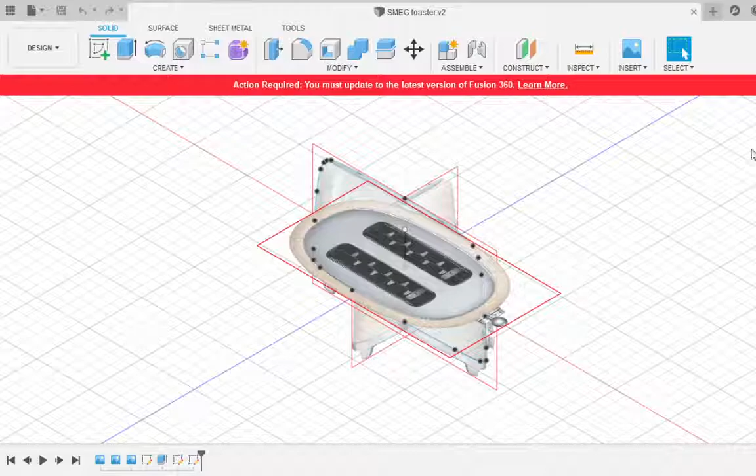All right, so if you've downloaded the model, you should have the front, top, side views of the toaster. We're going to go over the lines. At this point, you should also have a trace line along the side. So I'll let you do the top view of these lines after. But for now, we're going to get this line that we traced around our toaster. We're going to bring it into the third dimension.

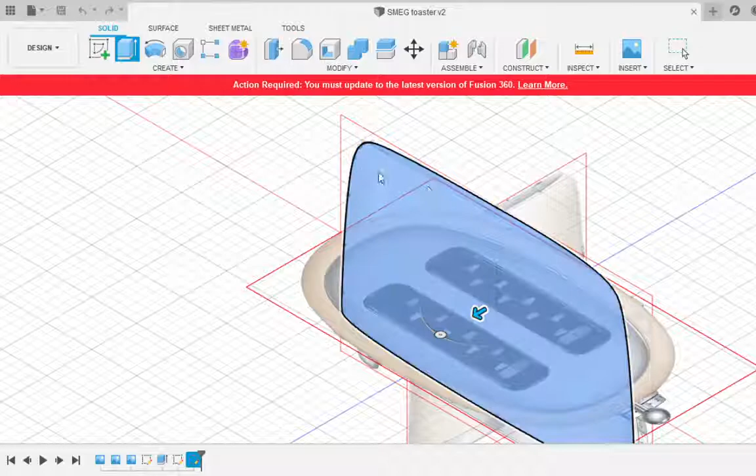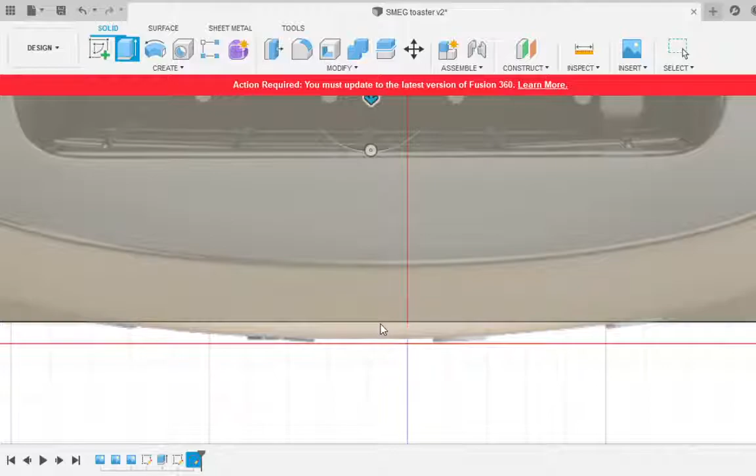We get this shape. We click extrude, and then as we extrude, we'll pick the whole surface that we have here. We're going to pick two sides, so we can go forwards and backwards. And for the amount, we have it hidden. The amount we go out, we'll look at our top view, and we will see how far out our toaster goes. See how we have this little gap over here? So we'll extend our

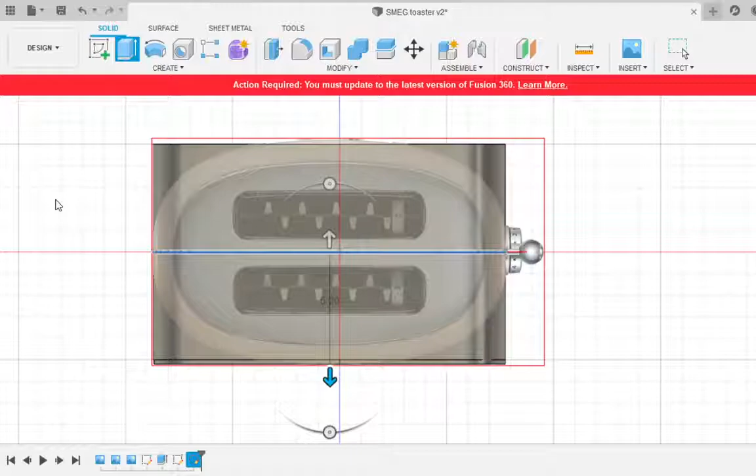body out. I believe we're making a new body. Hold on. A new body. This is just because I already have a body. So we extend this out to this side, and then we extend this side out to here until we hit our container. And when we press done, we should have the side, we should have a 3D, looks like a loaf of bread right now for our toaster.

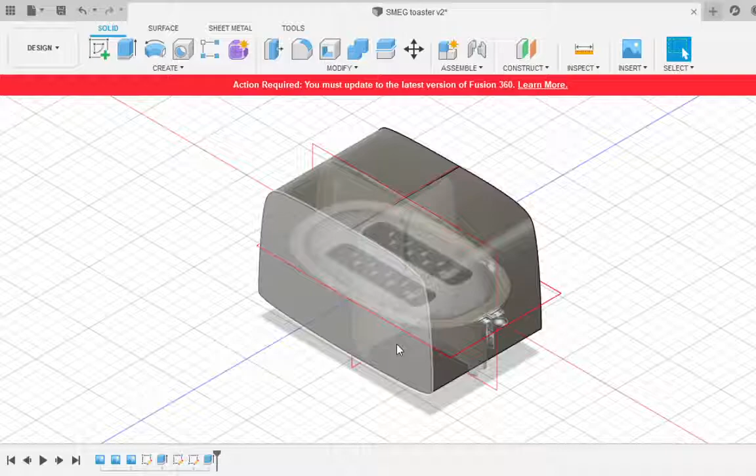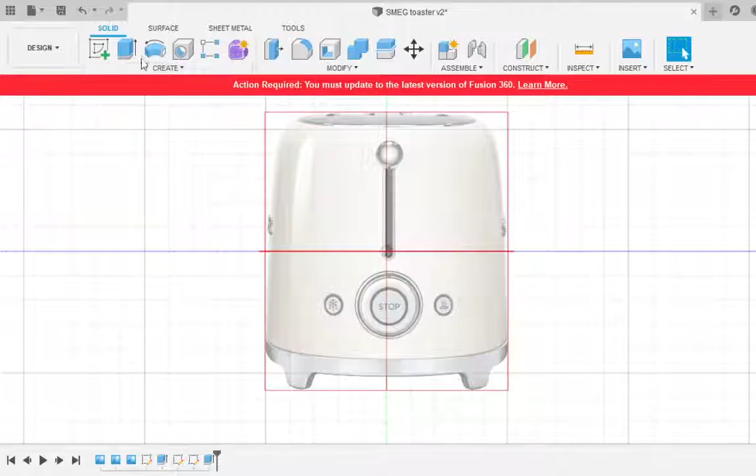So let's now do the same technique, but we're going to do it with the side view. This is the front view. We're going to do the same thing with the front view. So to assist us in this drawing, we're going to hide our body. And we're going to go create, we're going to pick this plane, and we are going to do the same thing. We're going to do the top line, all in one, and then the bottom line.

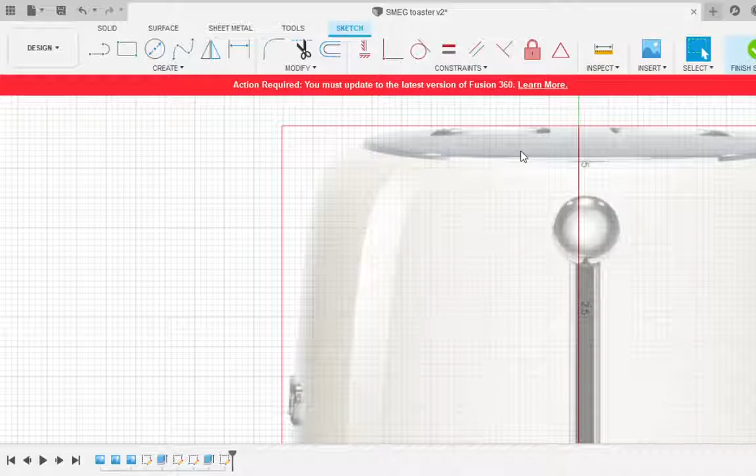Notice how over here at the top we have the metal color at the top. Later we're going to cut that out and make it into a new shape. But for now, just do your line, pretend it's all one solid shape. Also as you're drawing, see how we see the profile of the Smeg letters? We are going to ignore those, and we're just going to try to do the material underneath the Smeg letters. We will draw Smeg on top of our toaster later. I'm going to show you a really cool technique to make it pop out.

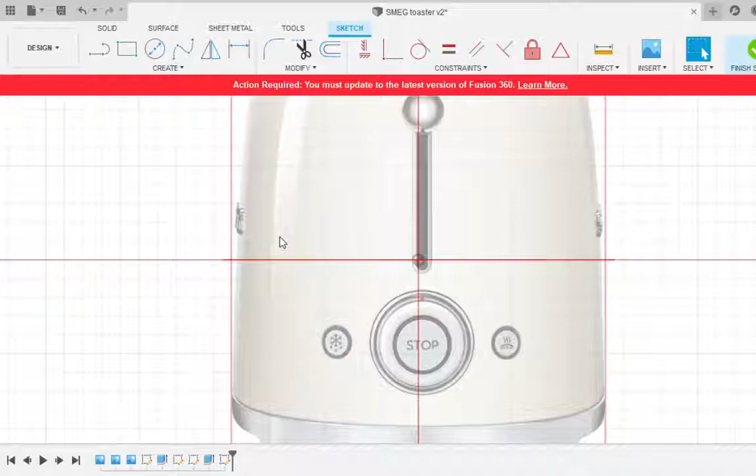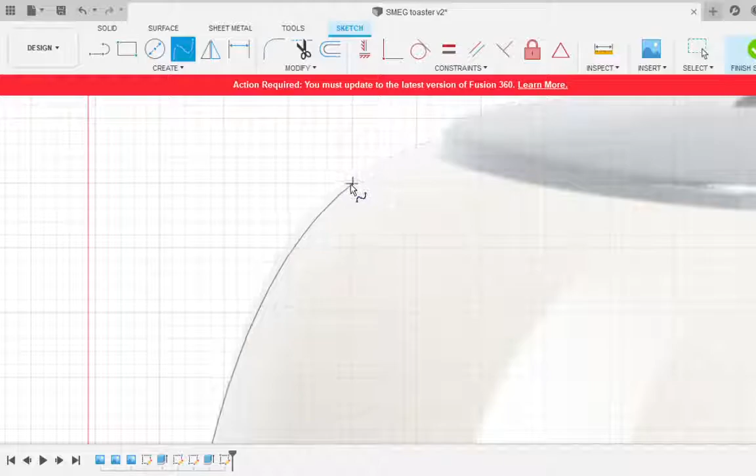So we're going to make a spline. We're going to start by this point over here, and then we'll just go through our dots. I believe you've made this spline before. I find when I'm doing the spline specifically, I change my snap settings so I make it not snap to grid. Not snap to grid. And we'll go over here. This is a spline.

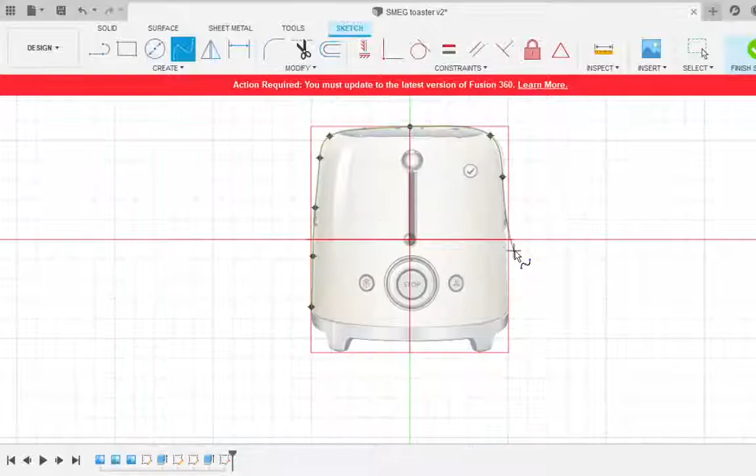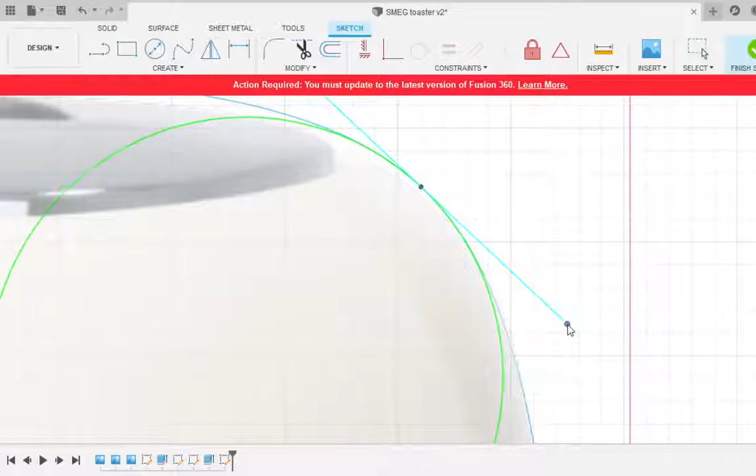Press enter, and some of these curves, I don't like this one over here at the top. I see how it comes out, so I can adjust that by adjusting this green line over here. So now it follows that line better, and same at the top. Oh, it's not following the top either. There we go. I think that's a much better fit for that line. Alright, everything here looks good.

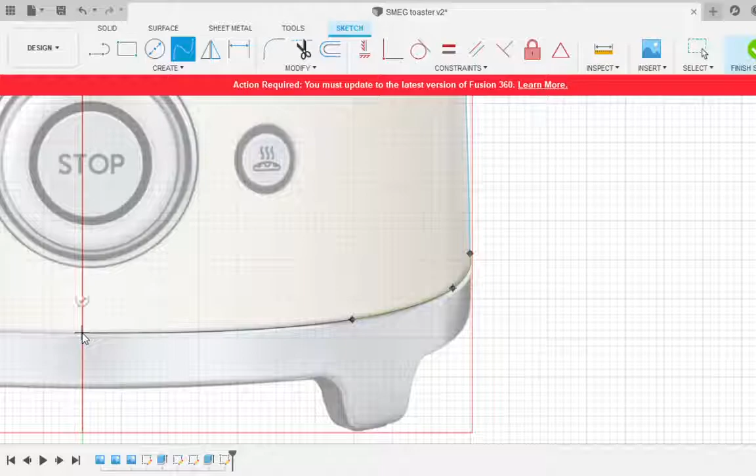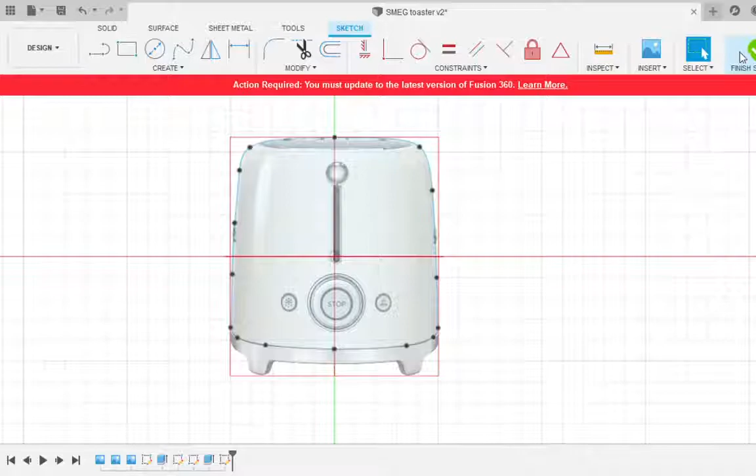And then we're going to do the same thing on the bottom. Alright, so the same thing as before. Now you should have your top and bottom lines. Okay, so now we have our side view, and I'm going to press finish sketch. So, let's just see what body we have. This is our body we have from our first shape. I'm unhiding it, so unhide your drawings.

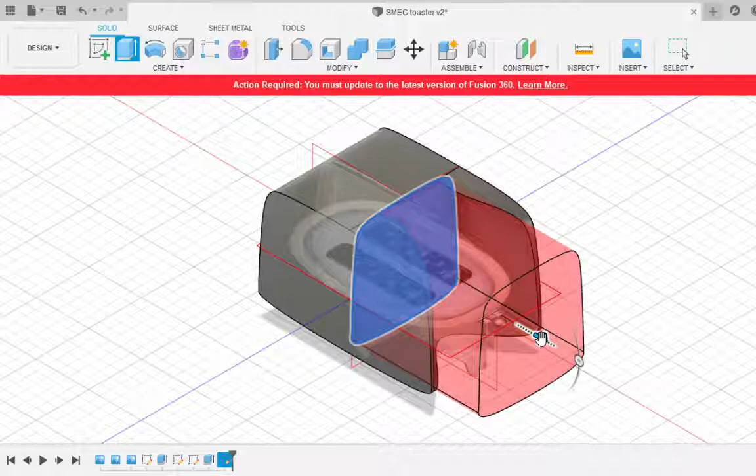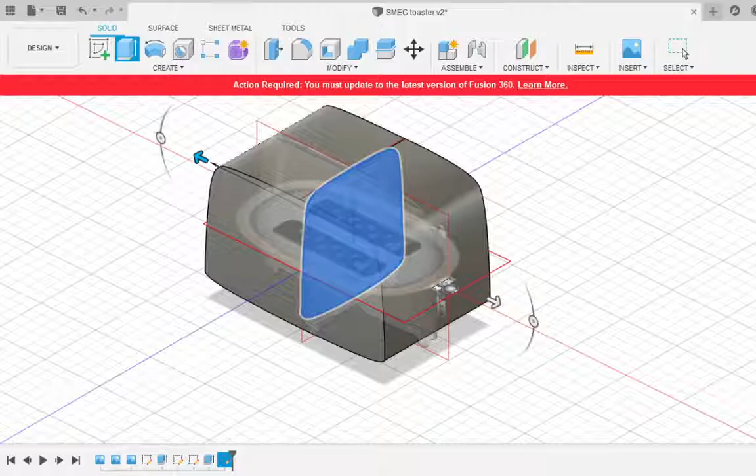We are going to go down. We're going to press a new operation. We're going to press intersect, which is the two parts. So imagine that it's going to make the body you originally have and the new body you're creating, and anywhere they overlap, it makes the shape. And you know you're dealing with intersect because it is yellow. Cut is red. Over here under operations.

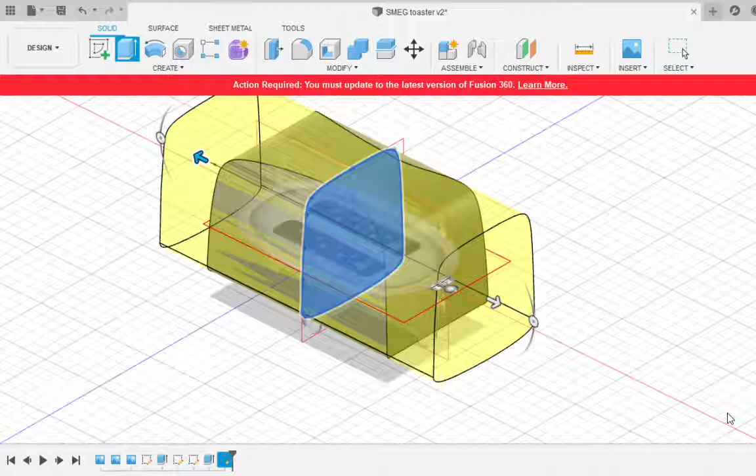Right? When you're dealing with intersect, you just make sure you drag it over the entire body. It doesn't matter how far you go, as long as you pass it. Because if you only do part of the shape here, it's going to decrease the overall size because the part you're intersecting is smaller. So we want it to overextend past the original shape. And then we press done.

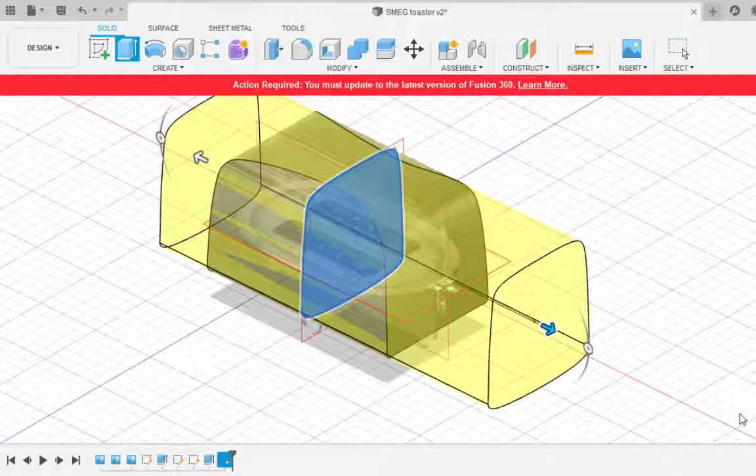And now, let's hide the original sketches. Sorry, and hide the canvases. Now we're starting to get a 3D toaster. So mine's really bad.

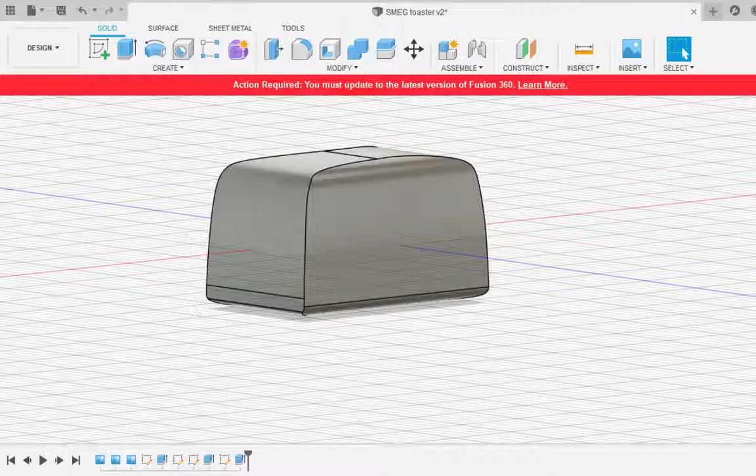Dude, what is that? So now we have our lovely looking toaster over here that looks kind of sad because it's not symmetrical. And that's due to, as we're doing our curved lines, we did not make a perfectly symmetrical spline.

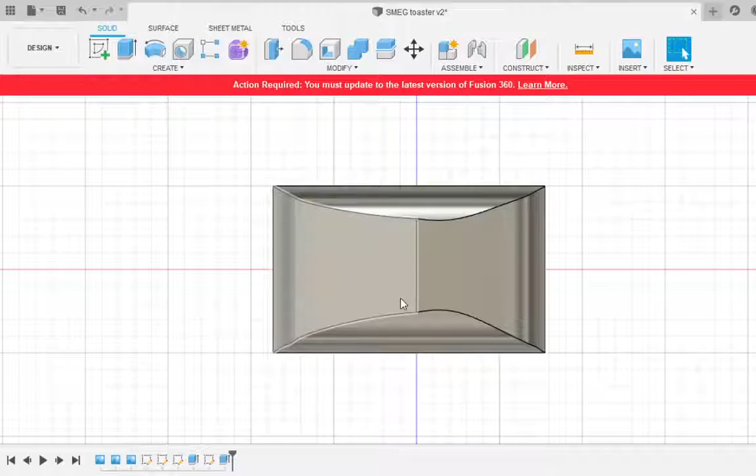So what we're going to do is we're going to get our toaster, we're going to cut it up into 4 quarters, and then we're going to pick the quarter that we want, and then we're going to copy that to make it symmetrical in both planes. So before we can cut up something into quarters, we have to get 2 planes, right, to cut it with. Now, if you perfectly aligned up your toaster in the middle of the page, you could use the basic planes we have.

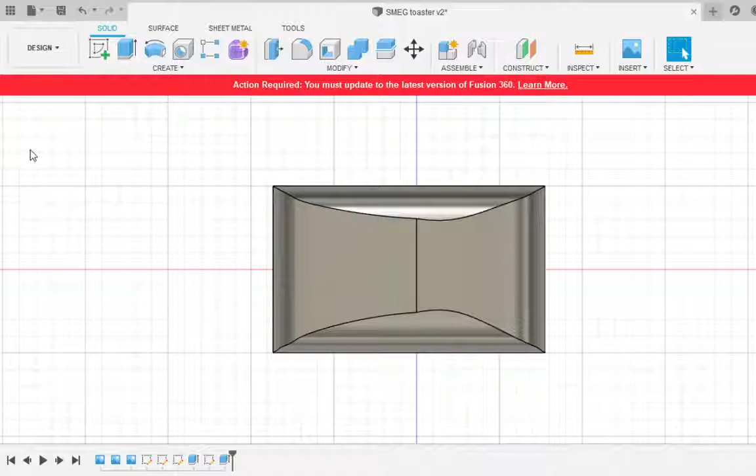Let me just show that. You can use your original planes you have here. But likely it's not in the very center. It's very unlikely that you have it in the center. So what we're going to do instead is we're going to make a plane based on some geometry that we know about our toaster.

So we know that in our toaster, we want to look for a very straight line that goes across our toaster that is roughly going to mimic our symmetrical plane. So for example, this toaster over here, I have this line right down the bottom of my toaster. I want you to find some sort of line in your toaster. This line would have generated if you made 2 separate curves before.

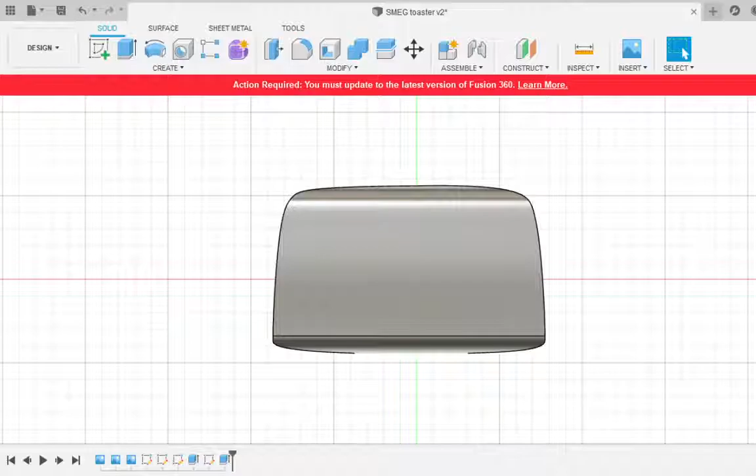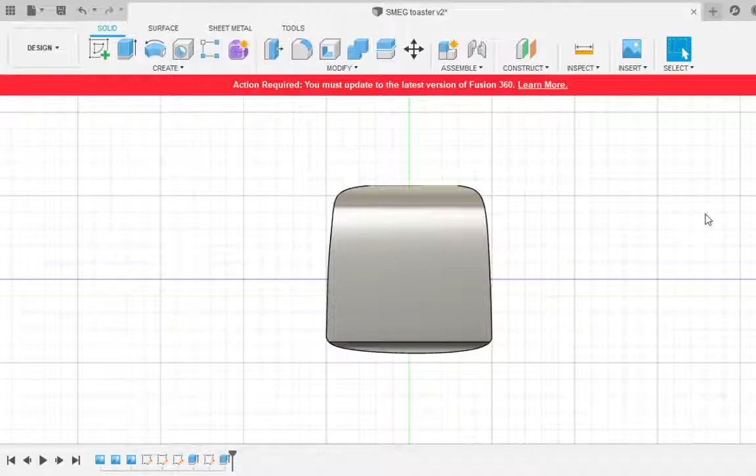And then let's look at the other side over here. I also have a line over here. I have this nice straight line that goes through my body on the screen here. Do you have those lines? No? Okay. So let me show you how we can make those lines then. All right.

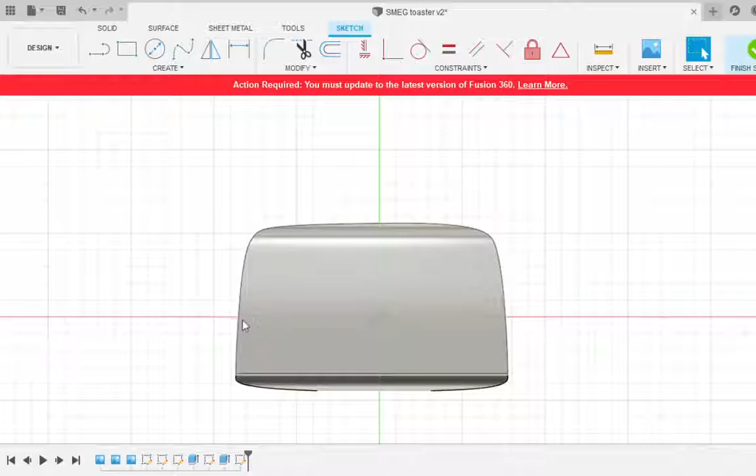So what we're going to do, let's go to create a sketch. We'll make a sketch in this direction. We are going to make a line that goes right through the middle then. So before we can make the line, this sketch is not going to attach to the shape we have here. So, actually will it? No, it won't. Our sketch is not going to attach to our body.

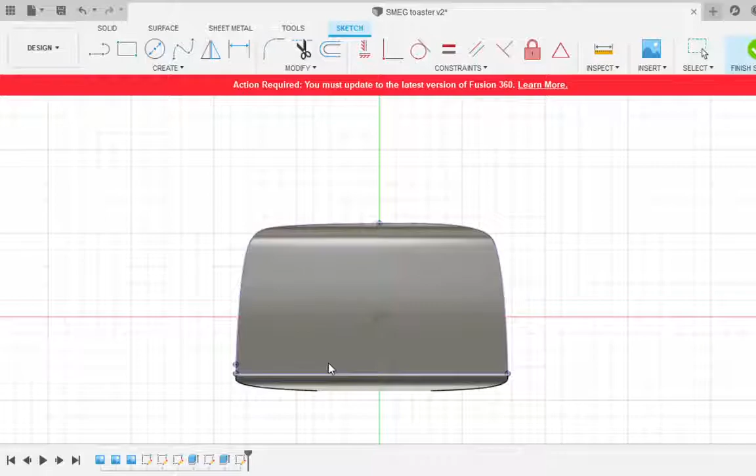So what we're going to do is we're going to go to create and we're going to go to project and include 3D geometry. We will press this face and now we should have the purple lines going throughout our body on the outside. So again, we have our side view. We press create, project and include 3D geometry, press that face, and now, once you do that, you should have this purple line on the outside. So if I hide the body, do you see you should have this purple line?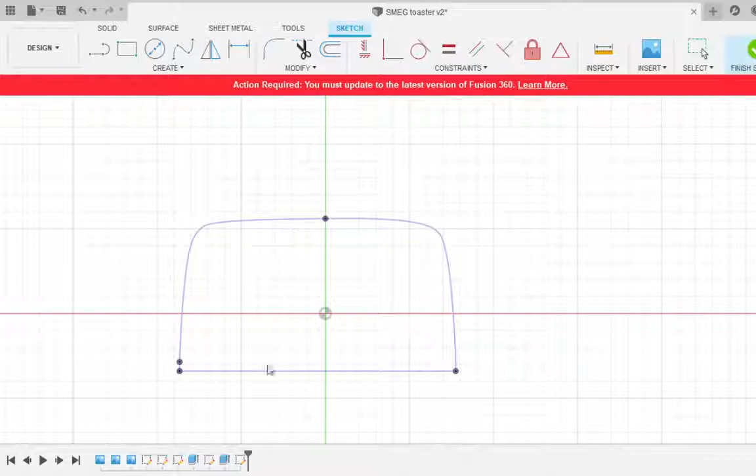Wait, where? Create, project and include. So now we have the projection. We can make a line.

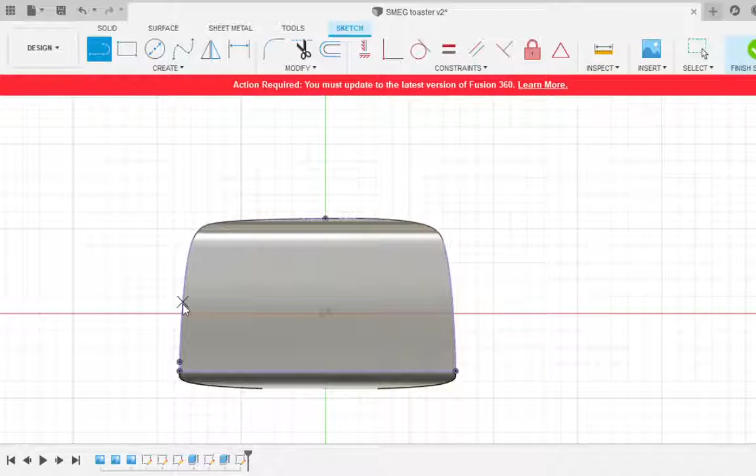Even if it's not purple, see if it does the same thing as my tutorial right now, where we're going to get a line, and as you bring the mouse over it, are you able to attach to the side of the toaster? Yes. No. That's a good sign. So see, if when you bring your mouse over, it should try to bind to the side of the toaster. That's not snap to grid. That is something different. I don't know what that is.

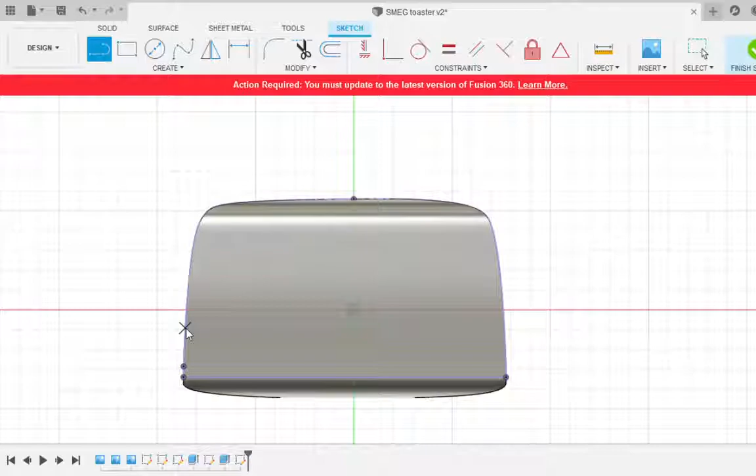Create a line, and then when you're creating a line, hover your mouse over the edge of the body, and it should attach to it. Once you've done that, you can click anywhere. So let's click here, and then you want to bring it along at 0 degrees, so it's flat, until it attaches to the other side of the body.

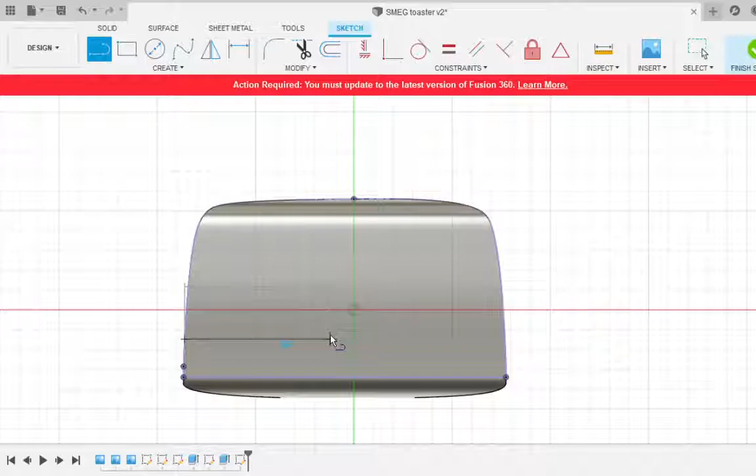What do you want to do? Hold on. I'm going to press Tab, change my angle to 0. So now that's locked in, and bring it across until it touches to here. Why isn't it attaching?

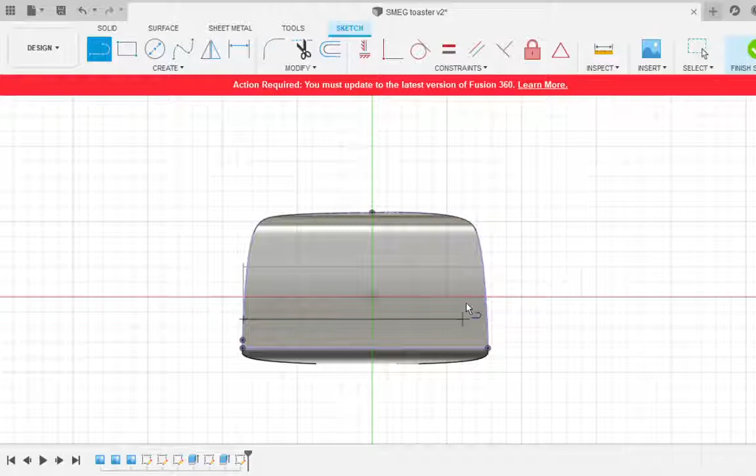That's a bit of a concern. Snap? What does snap do? That's a bit of a concern. Yeah.

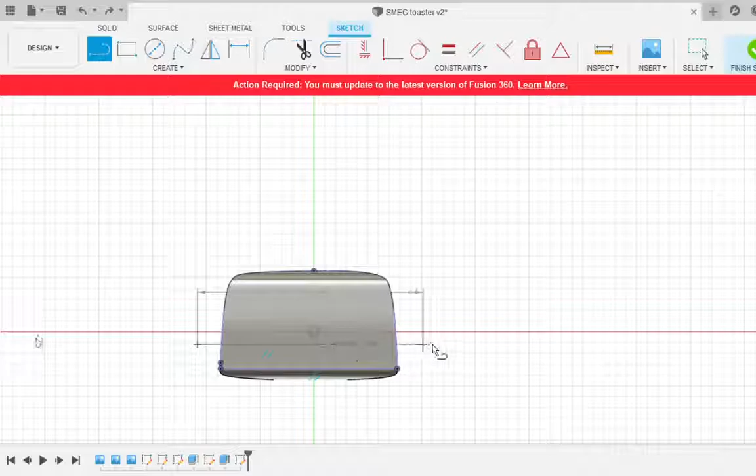Let's see if that works if we do that. Right, so we have a minor mistake, based on our projection.

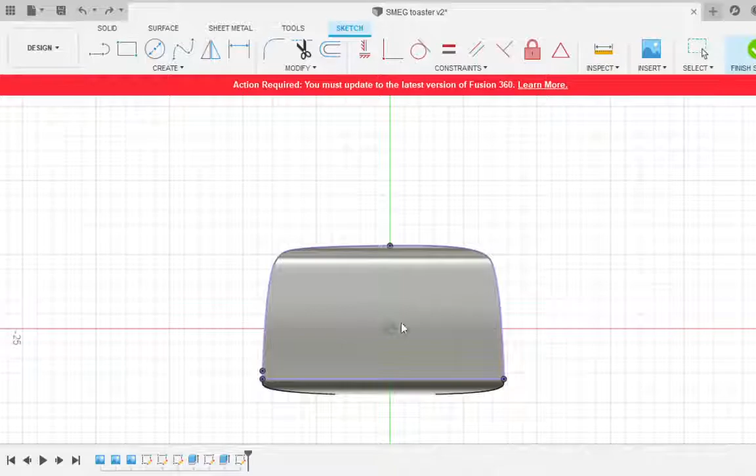So we have to go to Create, Project and Include, use the Project button, then click the surface, and press OK. Now this whole surface is going to be projected onto our plane.

Then we're going to make a line, and we're just going to make our line go through our object. Where it goes through doesn't matter—I think down the bottom is better because it's our largest section of the toaster. The only important thing is that it's at 0 degrees, so it's a completely flat line. The length doesn't matter as long as it goes past our object, because we're going to cut it.

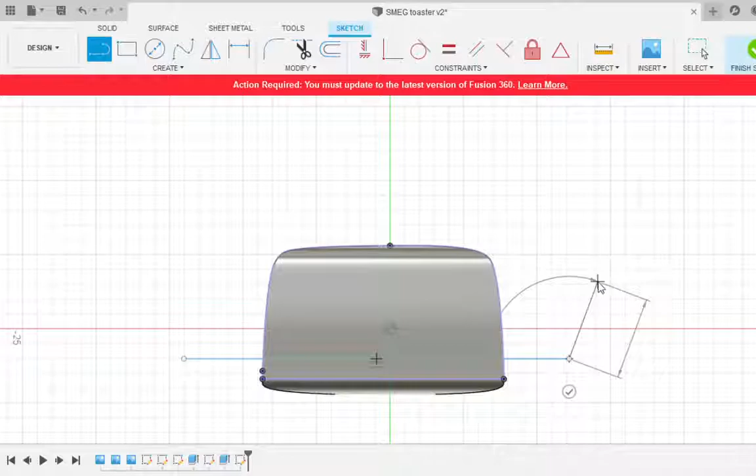Press the mouse button, and then we press Escape so we don't make an extra line to confuse us. And so now we have this line that's gone through our body.

We then go under Modify, and we're going to press Trim, which is the scissors icon over here. Notice as we highlight over the line, it should be highlighted in blue, and the red part that you're eliminating should be outside the body.

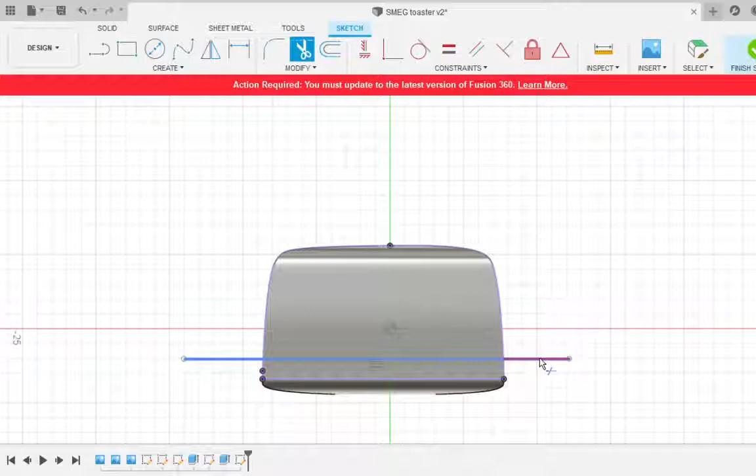This could only happen because since we projected it, it's saying that drawing, that shape of the toaster, is included in our sketch. So we get rid of that, and we get rid of the other side, and now we have a line that goes through the toaster. That's all we need for this sketch.

We can then press Finish Sketch. I have my sketches hidden, so let me just show them. So we have this sketch over here.

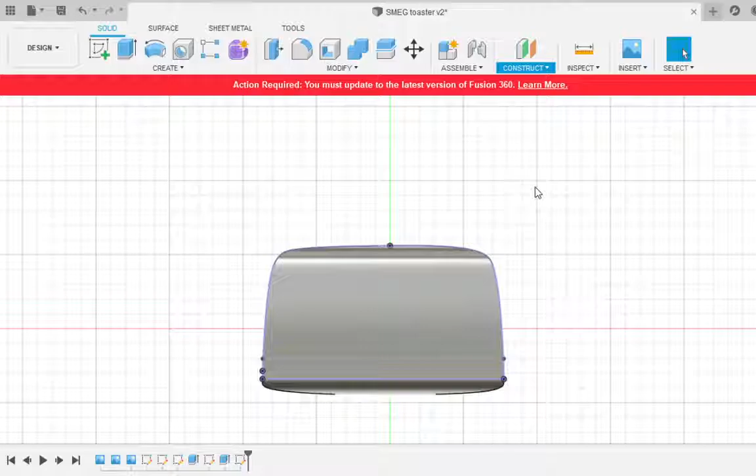Then I'm going to go to Construct, and make a plane along a path. So I click this, and if I select this path over here, I can make a plane.

Let me go in a 3D view so we can see it. So I have a plane here, and like before, we can adjust where that plane is. Over here, under distance, this is a relative distance, so if we put it—right now I have the distance type as proportional—I want it at the midpoint, which is 0.5. Direction proportional, 0.5, it's going to be halfway through the object.

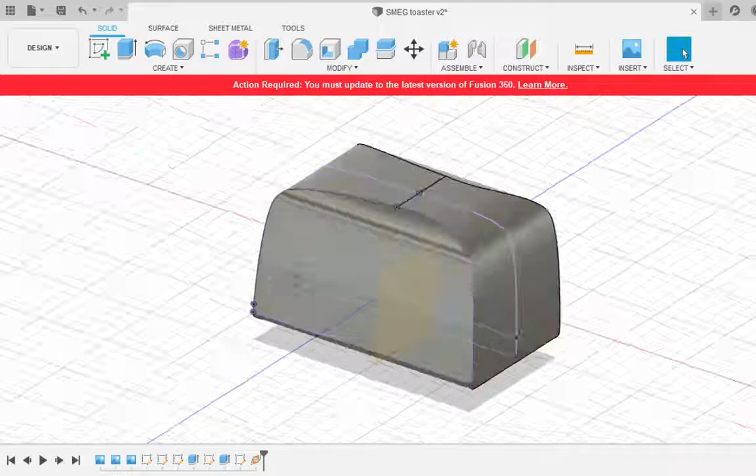And then if I press OK, this plane should now be at the midpoint of our toaster. Lucky I did that, because this midpoint is different than the midpoint of the actual drawing—that's what the green line is, that's of our whole origin.

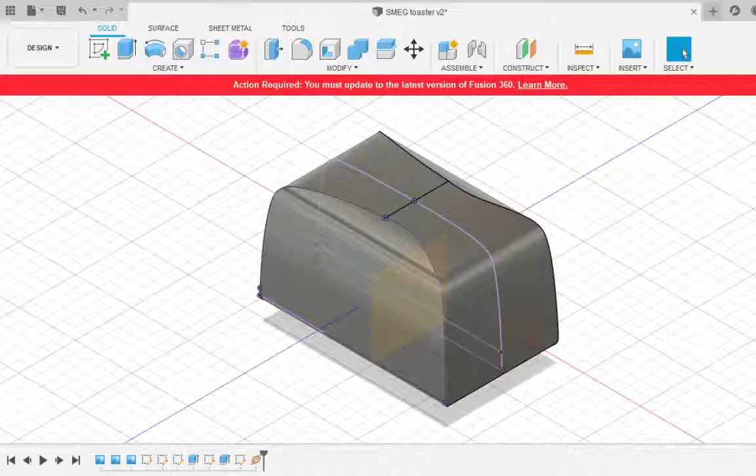And to show you that process again, we'll do it for the front side now. So I'm going to press Create a Sketch. I will pick this plane over here. I'm now in the front view.

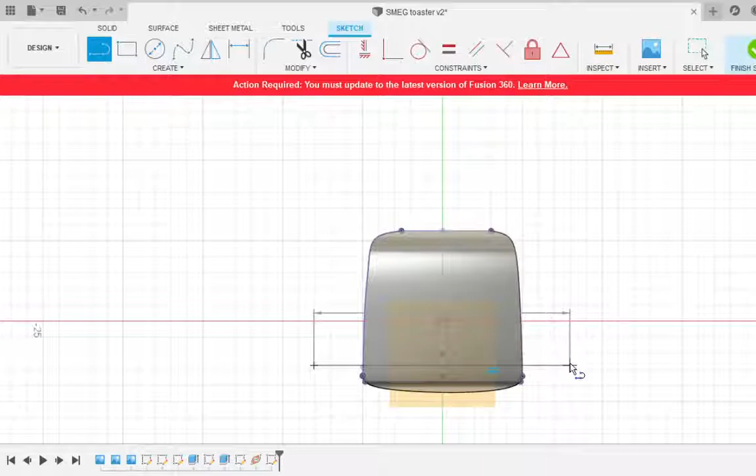I have to create, project and include. Project, I'm going to press this face, press OK. Get a line somewhere near the bottom, at 0 degrees, so flat. Yep. And then press Escape, and then trim both sides.

And so now we have a precise line again. Press Finish Sketch, and so I have this blue line over here.

And then I will construct a plane along a path. I'll press this plane. Distance, I will make it 0.5. This allows you, if you ever want to get a shape that's at a different proportion, to make it a quarter length, or whatever length you want, because it's proportional. And then press OK.

So now we have our two planes—sorry, not our X and Y, but in our two directions. We're going to use these to cut up this object.

We will go to Modify, and we're going to Split Body. Think of splitting body as a tool—like you have a loaf of bread and you cut it with a knife. That's what we're doing. So split body, not split face.

We use split face for 2D operations. We're using split body because we want to split this up into 3D. It divides the body using a profile, face, or plane. So we are just cutting it with a flat plane, like if this is a loaf of bread, cutting it with a knife.

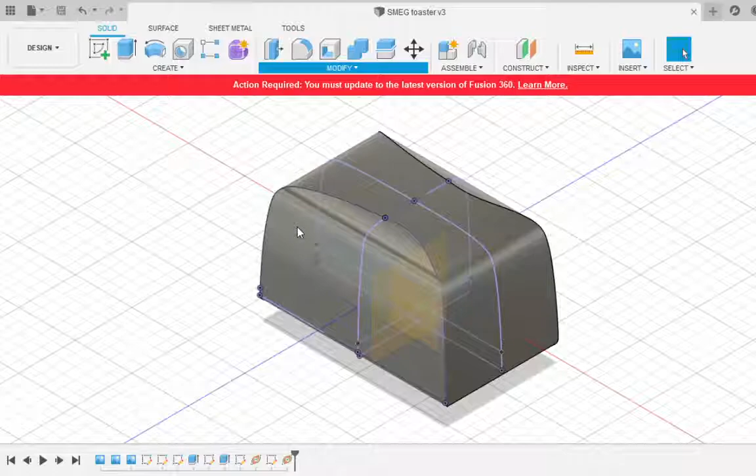We are going to press the body we want, which is this original body over here. Then if we press splitting tools, we will try to highlight the plane. Now, it looks like it's a hard plane to reach. We have two ways to actually select this plane.

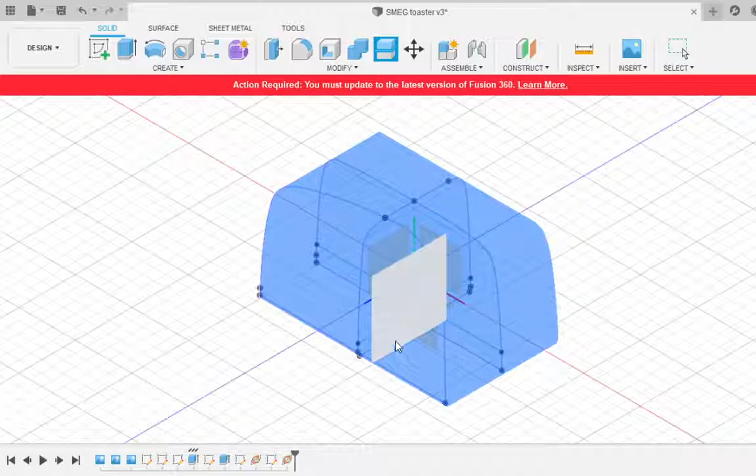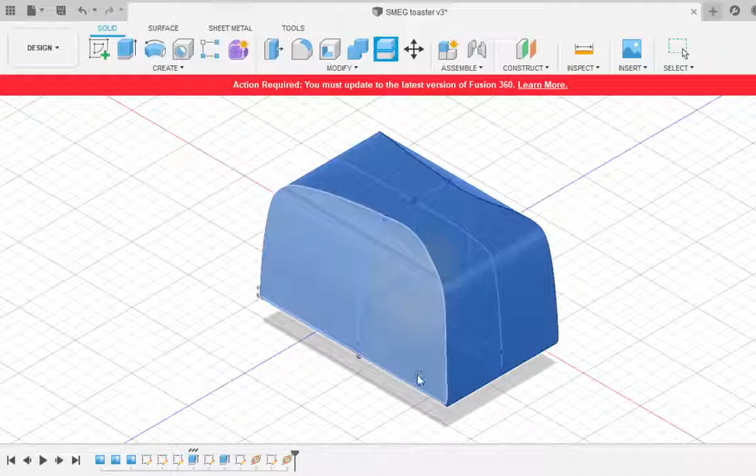We can either hide our body to make us select the plane, or, since you can't see because you're watching this on a tutorial or in class, I'm going to hold down the left mouse button, and look what happens as I do that.

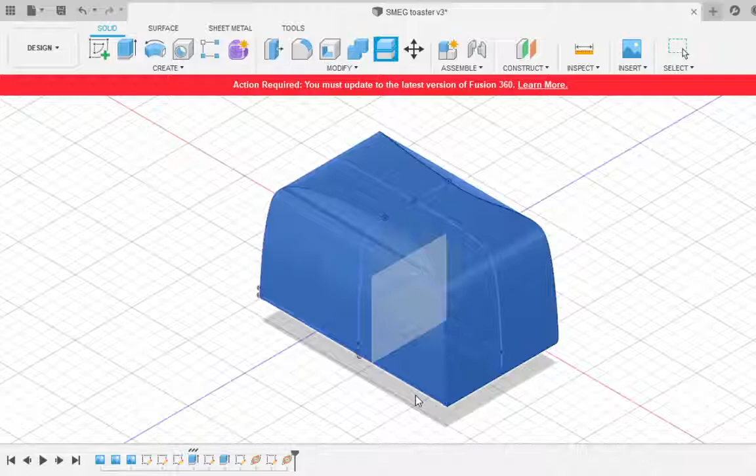When you hold down the left mouse button, it shoots a bullet through the drawing, and it says here are all the different objects on the mouse right now. So as we can see, there's the side face, the bottom face, and this plane we just made. This is a very useful tool for selecting an object, surface, or body that's inside something else. It's going to be very important as your drawing gets more complex and you make more faces.

So it's that plane over there. I press enter. Now this drawing shows based on the plane you've done. It approximates, so you want to cut this area. If that looks correct, you then press OK.

We're going to do it in half, then do it in half again. I like to do this one plane at a time because it's easier. So now I've split the toaster into two, and we're going to do the same approach with the other plane.

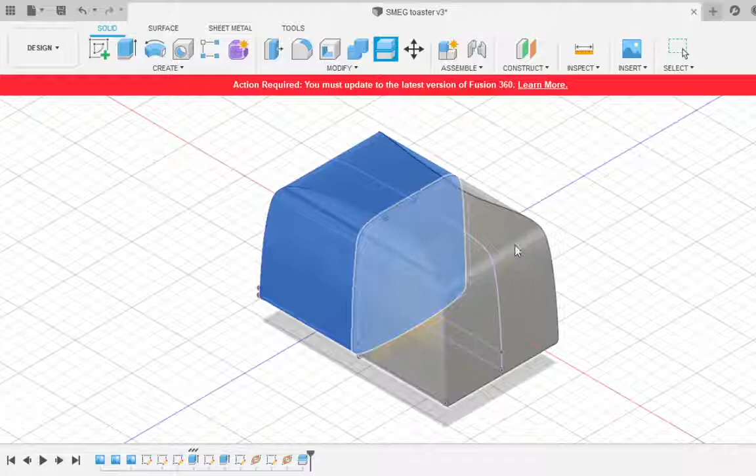Yes, correct. So you're right, it's two bodies now. So when we go to split body, we're going to press both bodies. Notice over here it says two things are selected.

Our splitting tool, we want - where is that plane we made? It's down there. Not that, we want this plane over here. And then we press enter, we press OK.

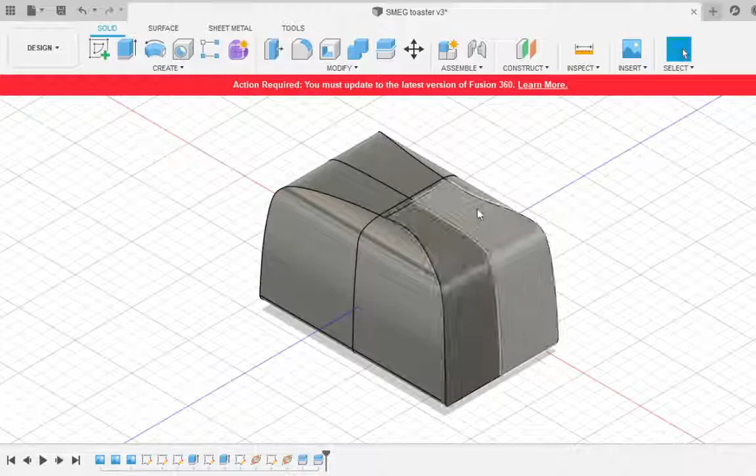And so now we have 4 bodies. Let me hide everything else. We want to hide this, hide this. So now our toaster is 4 bodies. We can hide our bodies.

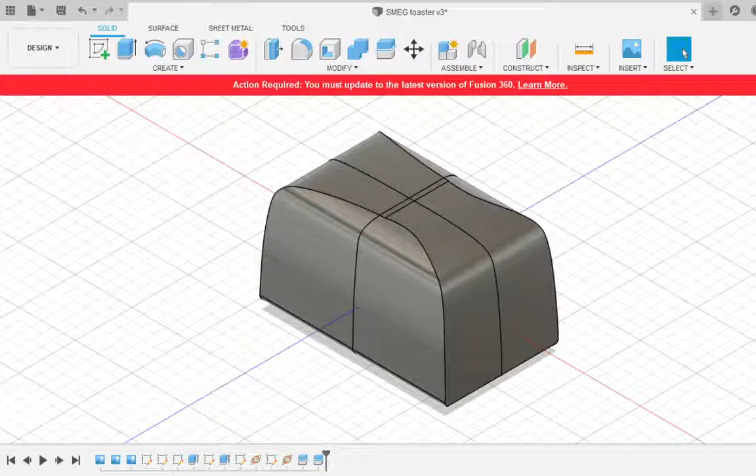So now we have the option to pick one of these bodies to copy it. So now that you have your shapes, I'm going to pick this body over here, body number 4, for the one that I'm going to copy in symmetry to make my shape. So I'm going to hide all my other bodies.

You don't want to delete any of these bodies because we used these bodies to make our projection previously, and if you delete the body, it will have negative effects on your projections. So in Fusion 360, unless you really have to delete something, just keep it and keep it hidden. You can even name it, so say do not use this.

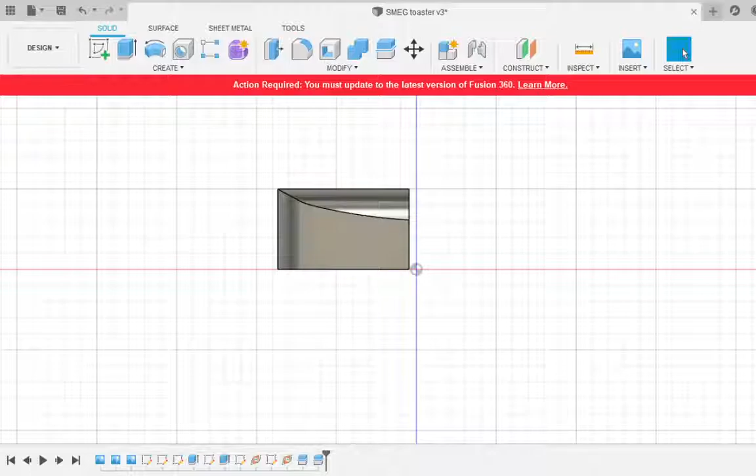But this is our body we have over here. We'll go into top view, and notice because it's done with a very flat plane, these are now flat surfaces. We are going to modify.

We are going to, which one are we going to do? We are going to... which one's the mirror one? Is it combine? Hold on.

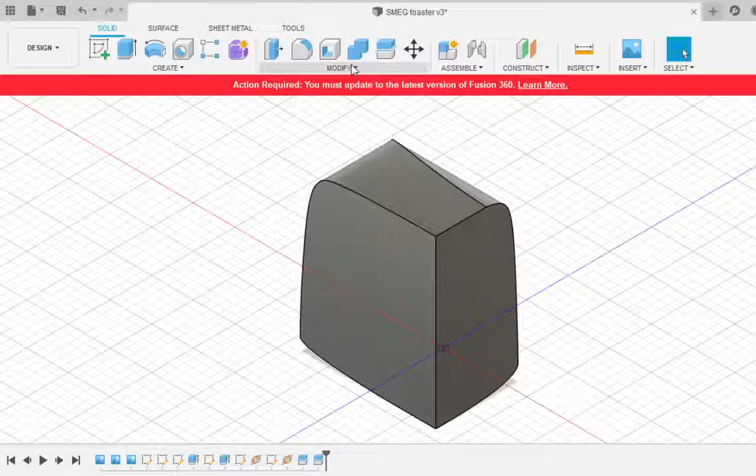All right, so the tool we're going to use, if we go under create, we're going to go to mirror. Now mirror, you can use in sketching, but you can also use mirror for 3D objects. So we're going to press mirror. By default, it's going to have faces.

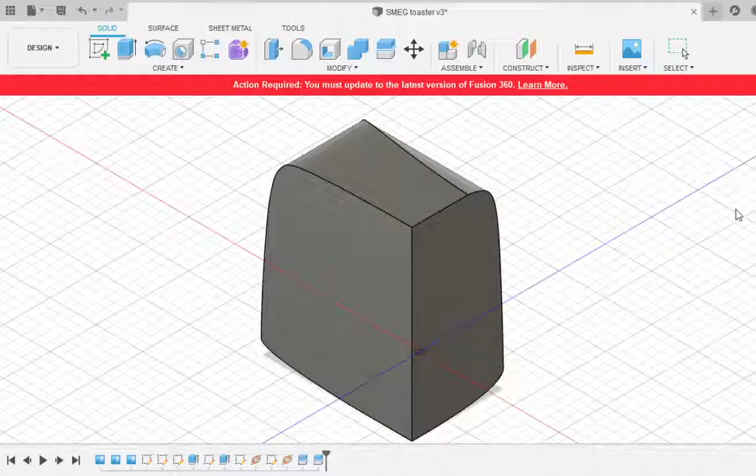You don't want faces, you want to do the whole body. So we're going to go down here, press body. We're going to press this body that we have over here. We're going to press the mirror plane, and press the face. We can either press the face that we made over here, or pick the construction plane that we made. So let's just pick the construction plane.

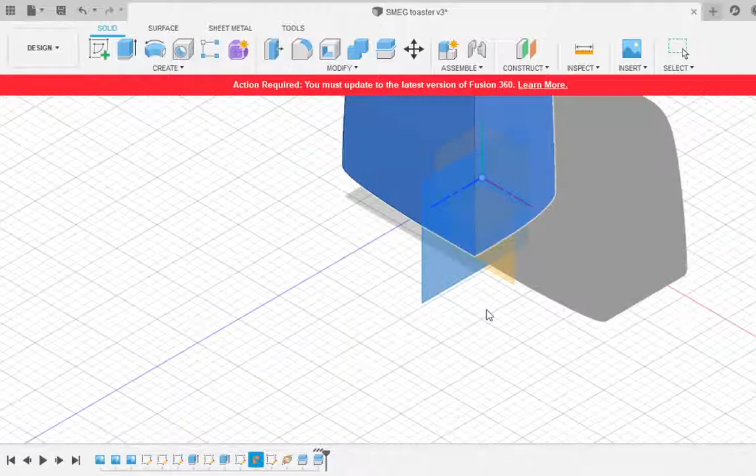And so now that should be our body there. And in this particular case, we do want it to join because we want to make one solid body by the end. Okay? And then we'll do the same thing in the other plane.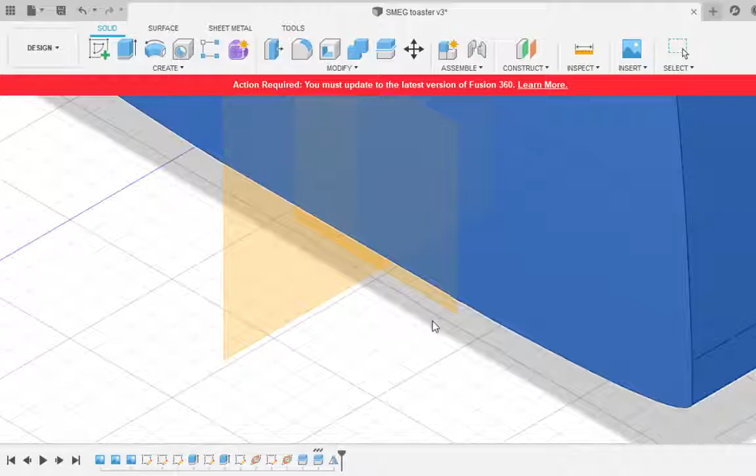We'll go create, mirror, select that body, then mirror plane. We want to press - where are you? You're this one over here, right? Press this over here. Done, and then we press OK. So now that is a pretty nice looking 3D toaster. All right.